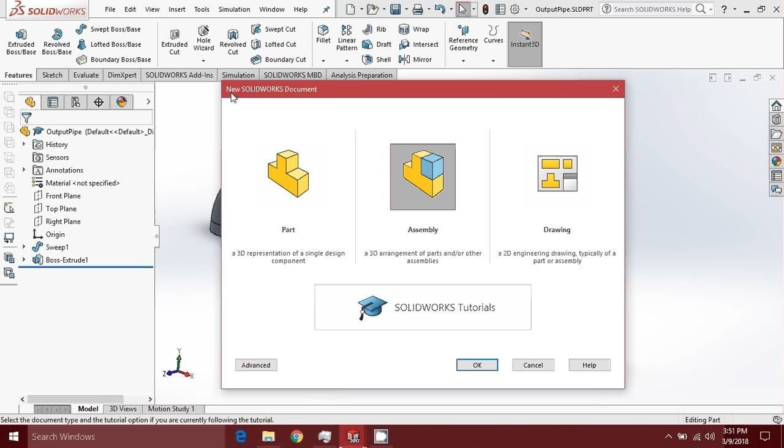To do this, I'll click New under the File menu and open up Assembly. It's asking me to begin by selecting parts to insert. I'll select the first one, the well casing, scroll down, select it, press OK, and place it in space. Now the first part that we select is fixed. You can tell here because it has the F, which means this part is fixed in space. It can't move or rotate in any direction.

This is very important because we consider this our base part and we assemble everything else based on this base part. The next thing I'll insert is the well seal. I'll go ahead and place that in space. I'll right click here and click Float to make sure this part is not fixed as it previously was, and now drag this out here in space.

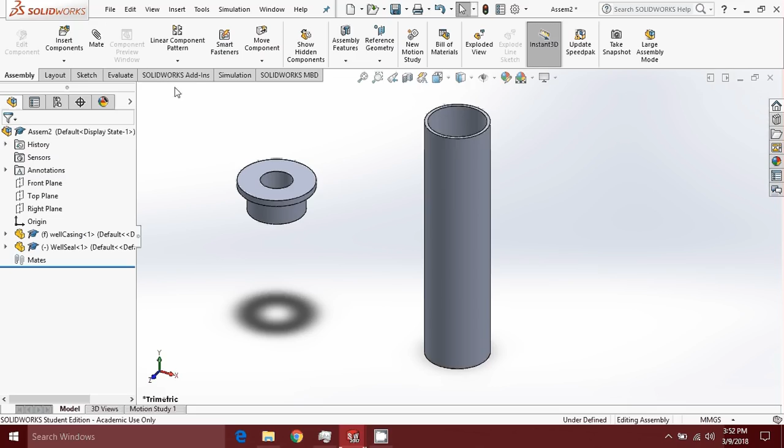Now I'll click Mate, and I'll mate the inner cylinder here of the well casing to the outer cylinder of the well seal, and it's going to automatically create a concentric condition, which is perfect.

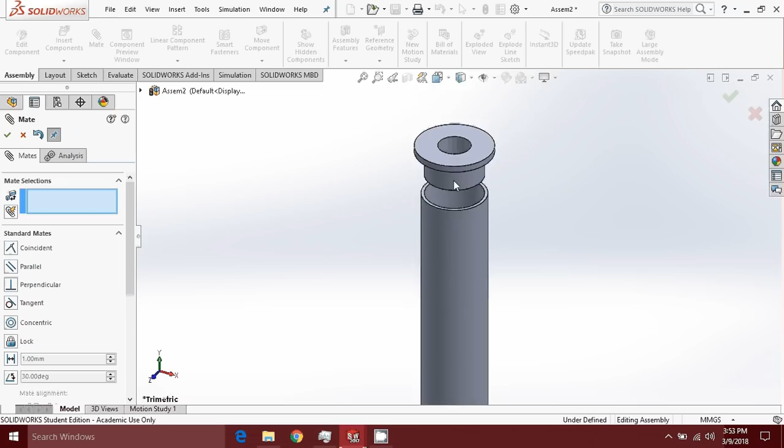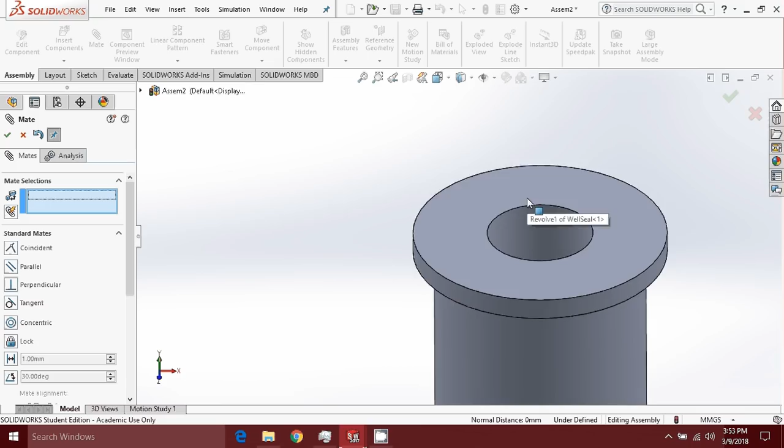Then I'll go ahead and slide the well seal up, and create a coincident mate by selecting the top face of the well casing, zooming out, and selecting the bottom face of the well seal, so they line up coincidentally by default. I'll press OK. Now we'll zoom out back to the full assembly.

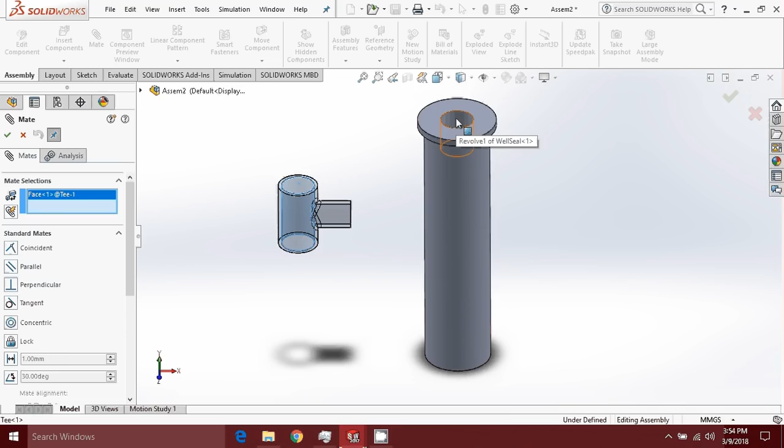Next, I'm going to assemble the T. I'll insert the T and place it over there in space. Same thing, I'll select the cylinder of the T to match the cylinder of the seal, then drag this upwards. You can see it rotates as well as moves along the axis. I'll select this top face of the seal, zoom in, select the bottom face of the T, and press OK.

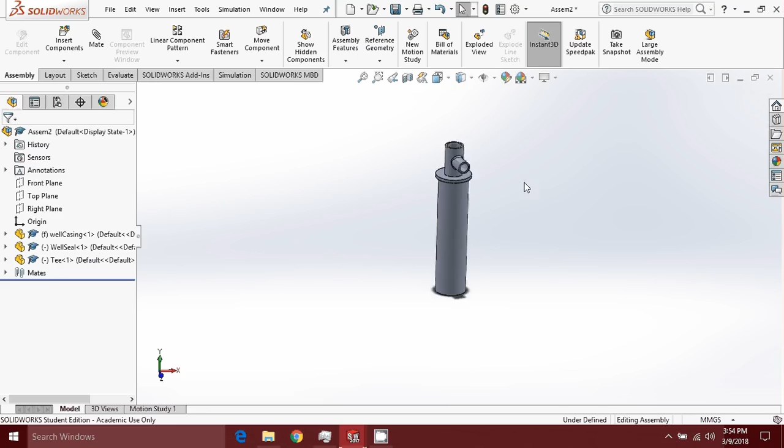Now before moving on, I'm going to create another mate. There are a number of different ways of doing this, but essentially this T right here can rotate in any direction right now, because we haven't set any kind of mate restriction onto the direction of this T.

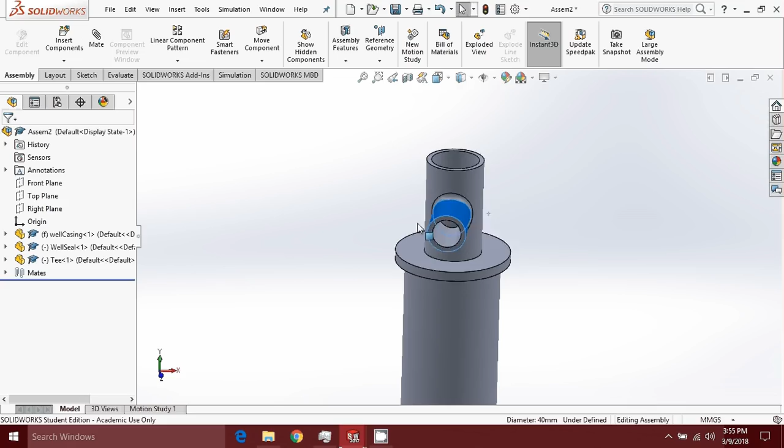The other option, of course, is to create a mate which locks the relative position of this T to the base part, the well casing. So I can select the two and select Lock, then press that. That locks the position, so this T can no longer move based on the well casing, which is another option to us.

I'm going to go ahead and delete that mate. The other one, which I find more useful, is to create a mate between any of the faces here and some relative geometry that makes sense. So I'll pick this right plane and set those parallel.

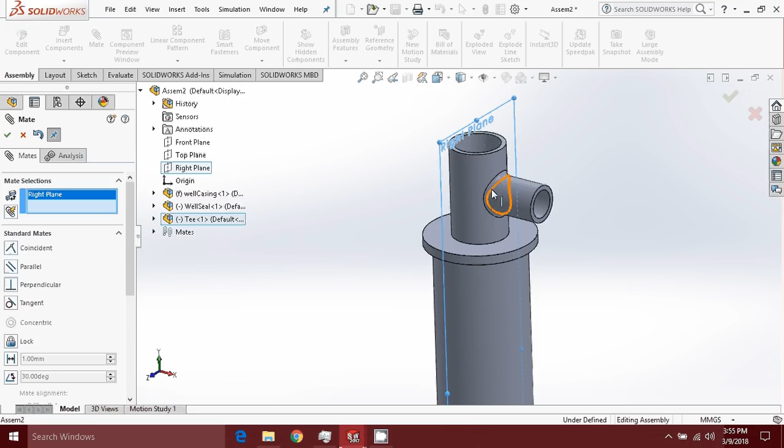So now, no matter which way I orientate or lay out my components, this T face will always be parallel to that right plane. This is really important because as we move through this assembly, there are a lot of unknown orientations of components, since we haven't built the base yet for this pump, so there are a lot of unknown variables.

Those unknown variables will cause a lot of headache when you're trying to manipulate the position of your components, because there are too many free variables and too many components allowed to move. So start by fixing this T so it cannot move, and it'll save you a lot of time and headache later on.

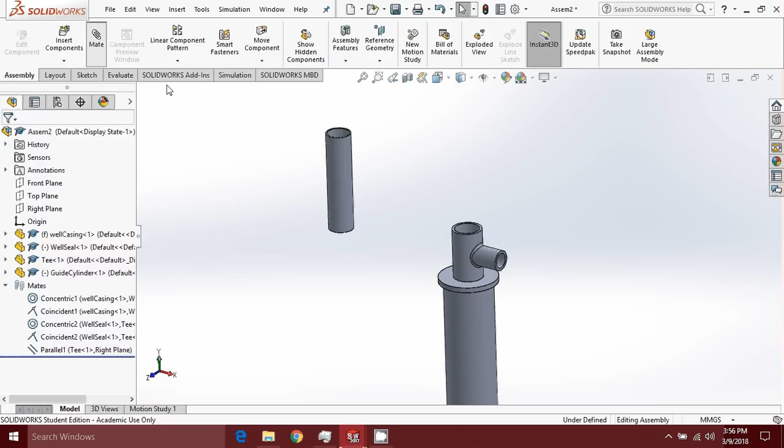Next thing I'm going to do is insert the guide cylinder. I'll select it and drop that in there, and mate the cylinder with the T concentrically. Now I'll select this top face of the T and the bottom face of the cylinder, just like that, and you'll see they coincidentally mate to be flush. Then I'll press OK on that.

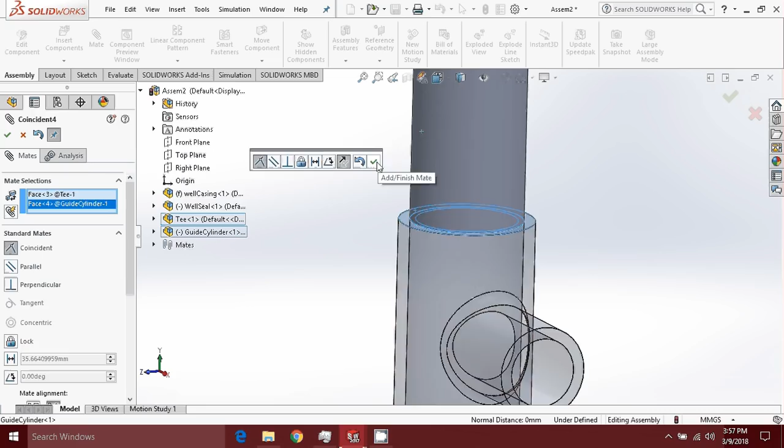Alright, so let's zoom out. Here's where we're at.

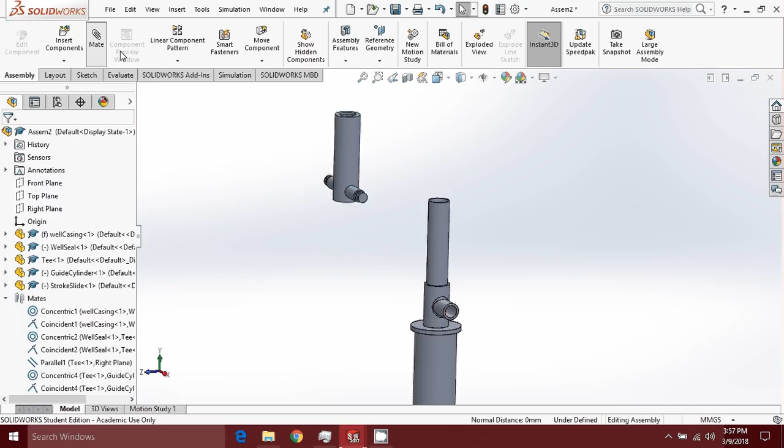Now I'm going to insert the stroke slide. I'll go back to my stroke slide and place that like that. And I'm going to start by making a concentric mate between the cylinder of the stroke slide and the cylinder of the guide cylinder.

Now you can see here I can move this up and down and rotate it. So we'll select one of these cylinders exiting the stroke slide, pick any one, doesn't really matter. And we'll also select that T, the cylinder exiting the T, and we're going to make those perpendicular.

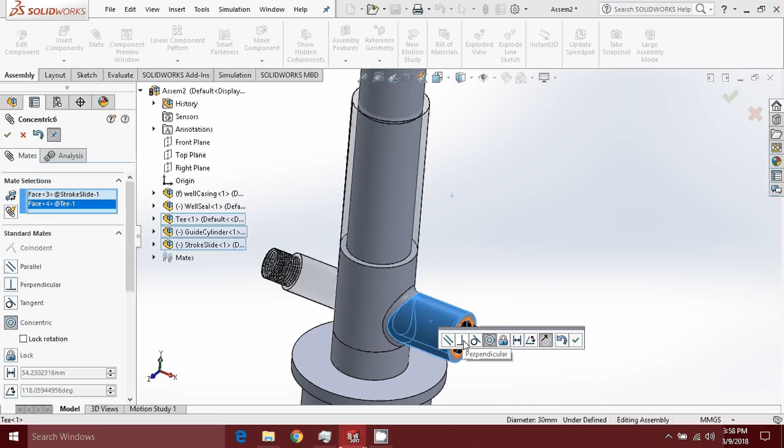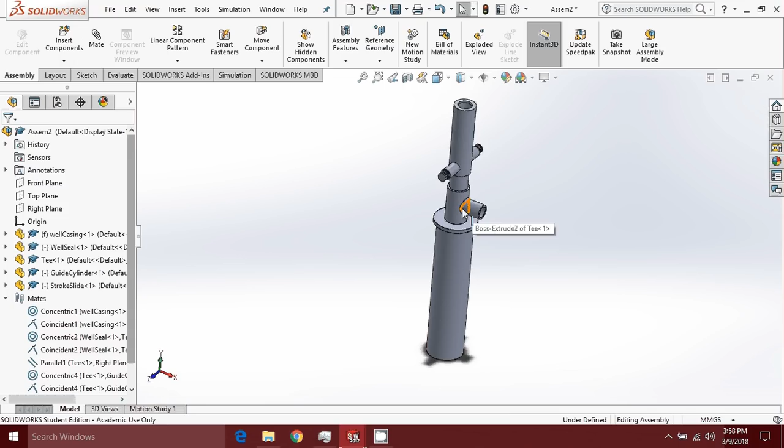Okay, so now we can see here that the stroke slide can move up and down, as it's supposed to in the pump design, but it can't rotate left or right because it's fixed to the 90-degree perpendicular mate between the T and the stroke slide. So make sure you're following these steps of how I am mating these components, because if you miss out something like that perpendicular, you're going to have too many degrees of freedom in your components, and it's going to be a huge pain later on.

Okay, now we can go ahead and keep this. I know in your lab manual it says to lock the movement of the stroke slide. You can go ahead and just keep it free for now. I don't think it causes any issue in my way of mating. So you can just go ahead and leave it the way it is.

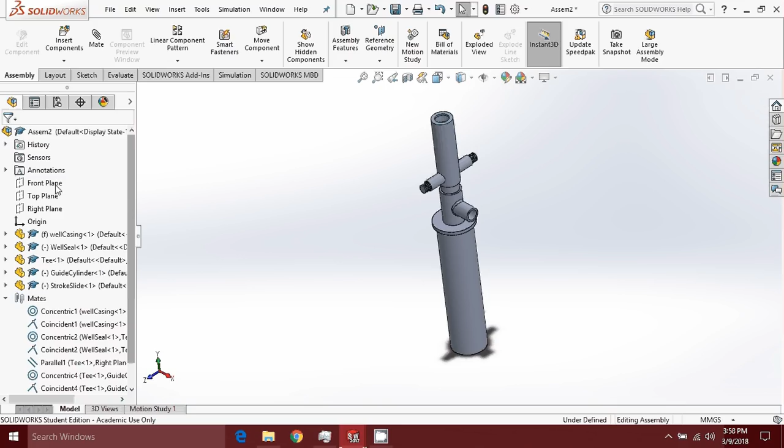Next we'll insert the offset link. So we'll drop one in there. And I'm going to go ahead and insert two since they're so similar.

Now, I don't know if you guys can see that, but for me it's pretty obvious that one of these holes is bigger than the other. An easy way to check is to look at the gap between the hole and the outer radius, the fillet that we made. You can see here this one's got less material, this one's got more material. So this is the larger of the holes, the 30mm hole, and this is the 24mm hole.

So what we want to do is mount the 24mm hole on the stroke slide, which you can see here, and we'll mount the 30 above.

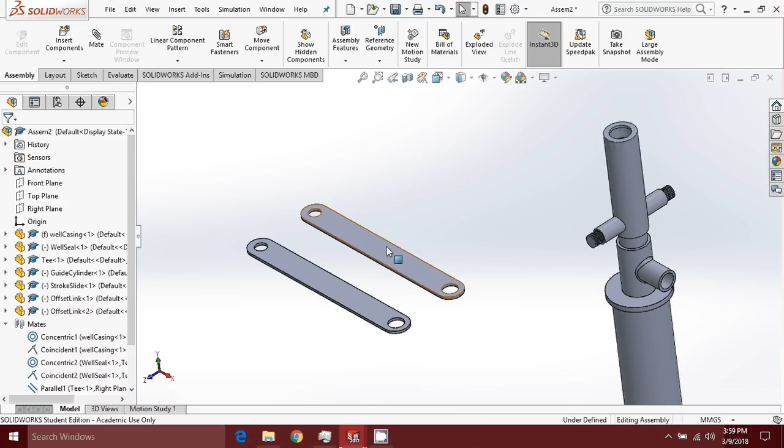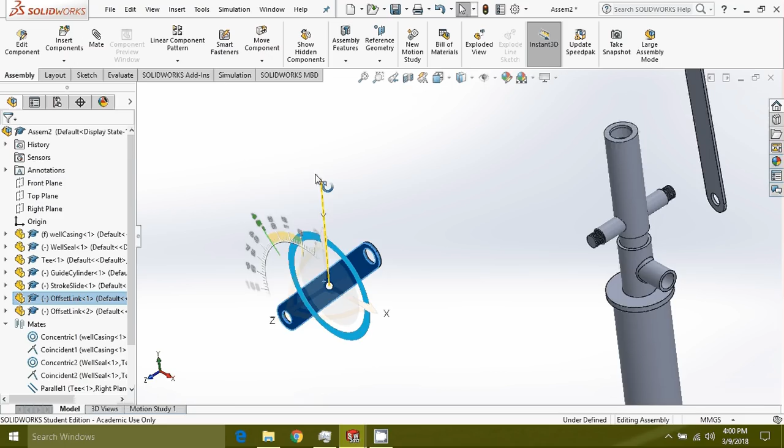So if you remember from our first labs 1, 2, and 3, I said that it's always a good idea to rotate your components and put them in their position before you start mating. I'm going to do that here by moving with the triad so I can get the correct orientation of these two links. Just like that, something like that. Doesn't have to be perfect, but just enough to help you out.

And now I'm going to go ahead and mate the cylinder. I'll select that cylinder there. So that's the concentric mate that I need. And now I can still drag this in and out.

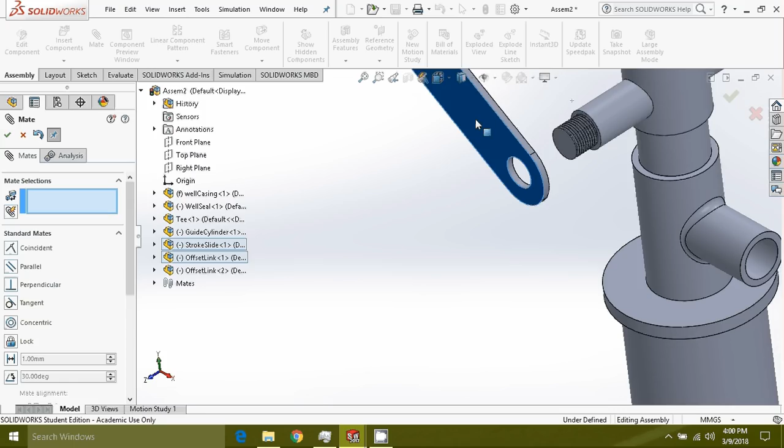So I will create another mate on this surface here and the inside surface of the link, just like that. Now I'm going to do the same thing for this link here.

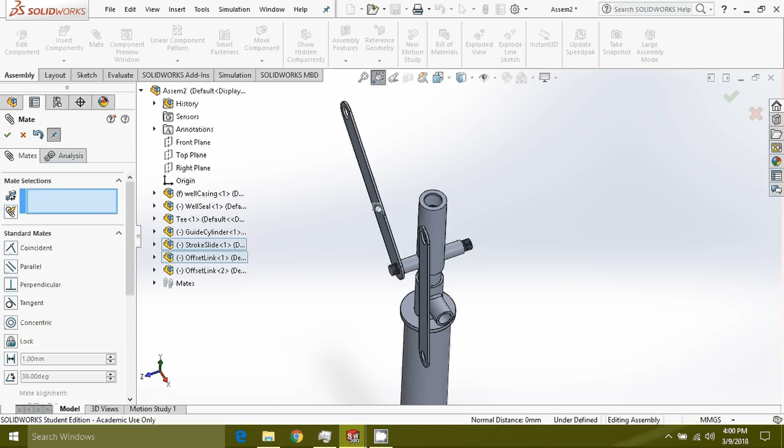You'll have to excuse me, my SolidWorks is being very difficult today, and it keeps zooming in and out for me. But anyway, we'll select the cylinder of the stroke slide, and then we'll zoom in here and select the inner cylinder of the link. You can see there it snaps concentrically, perfect.

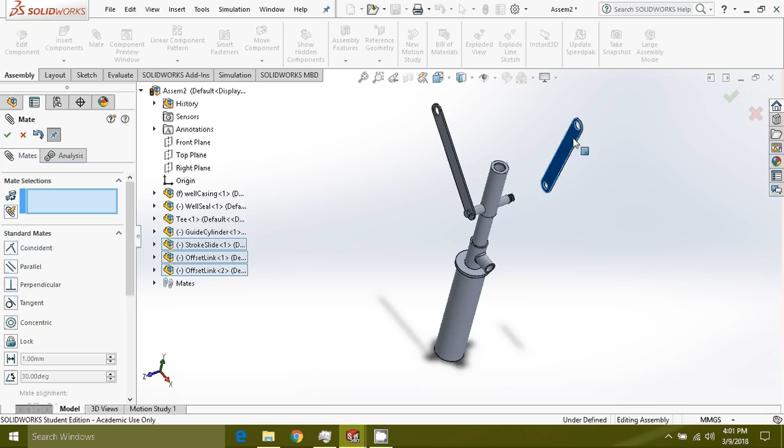Now I'll pull this away, and all I gotta do once I zoom in here is select the inner face of the link and this face right here on the slide, and you can see there they mate coincidentally, and there you go.

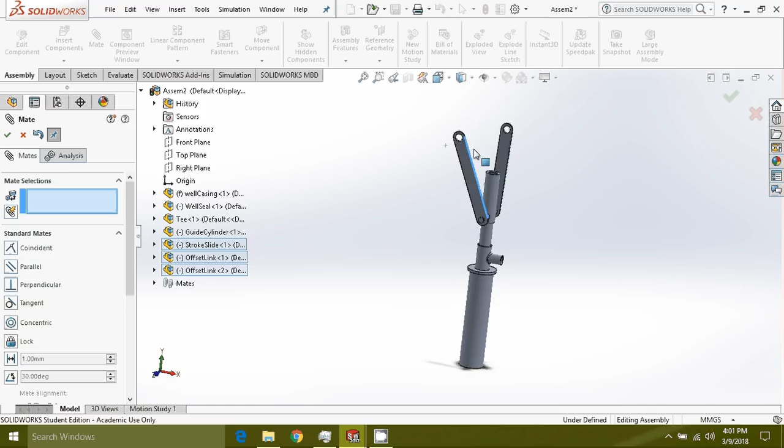Now you might find it easier to just sort of line these up vertically for the next step, which will be to add the pivot block.

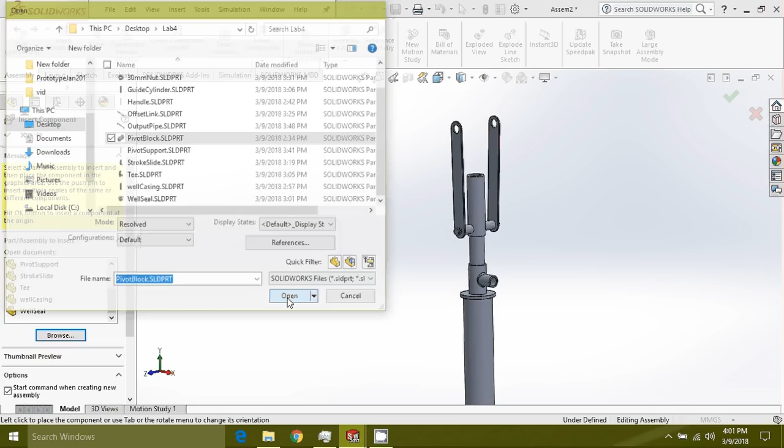So I'll go ahead and exit this dialog box, insert the new component, which is the pivot block. Mine's not open, so I'll just open it from that dialog box and drop that guy right there.

Okay, now I'll rotate this, something like this. Okay, and I'm just going to move it roughly in place. That's pretty close. Now I'm going to go ahead

and make these components mate by selecting that cylinder and the cylinder of the link, and then the same thing on this side, that cylinder and the cylinder of the link. Okay, we'll zoom out now. There we go.

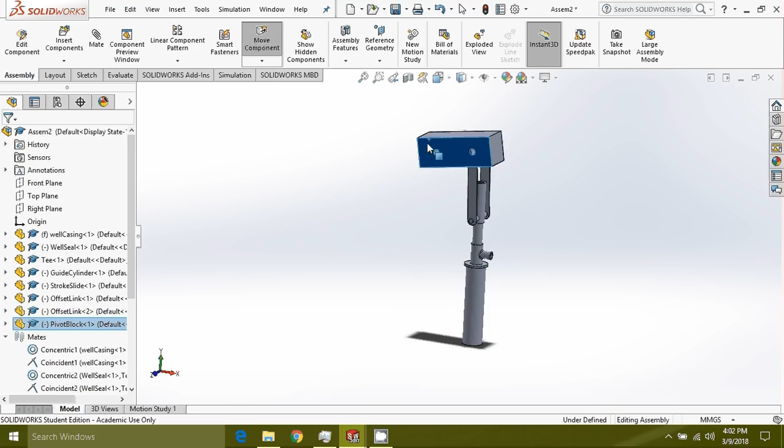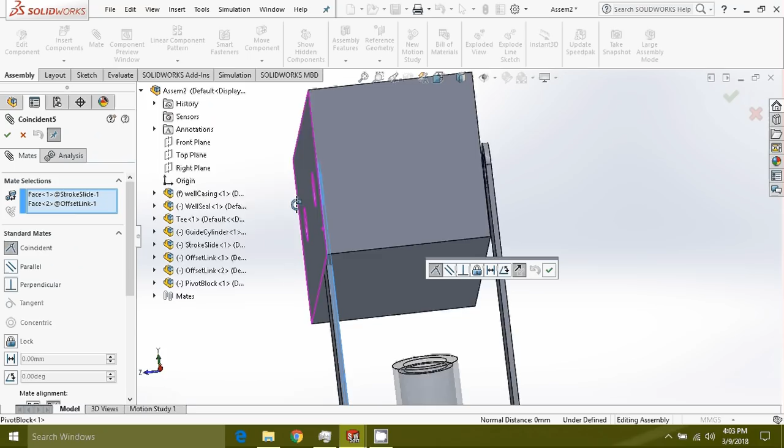Okay, whoops, I think I may have made a mistake with one of these mates. Yeah, okay, so I made a mistake here with this last mate. I'll just quickly edit that. Actually, that's very strange. Ah, there we go.

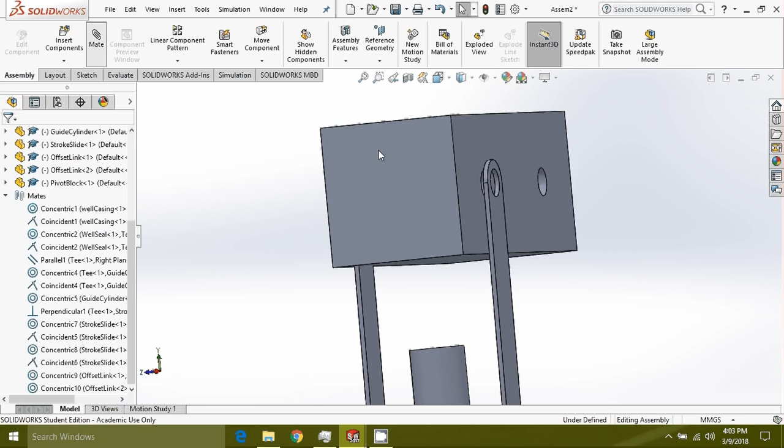I'm just going to create another mate here. I'm not sure why it's giving me such an issue. There we go. Okay, looks good. I think the issue there was one of the SolidWorks gremlins not understanding my coincident mate. But there we go, that works fine now.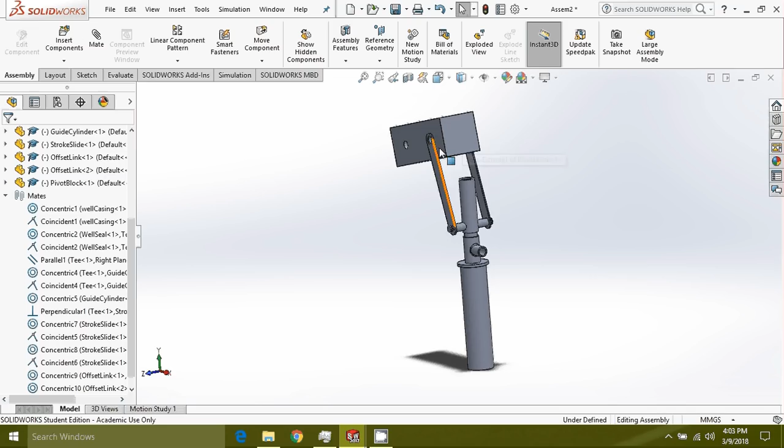So now, after creating those mates and having the pivot block mounted to these offset links, we're going to insert the pivot support. Again, insert components, pivot support, and just drop that somewhere in space. I'm going to rotate it to match the orientation of the rest of the components, and place that somewhere like that.

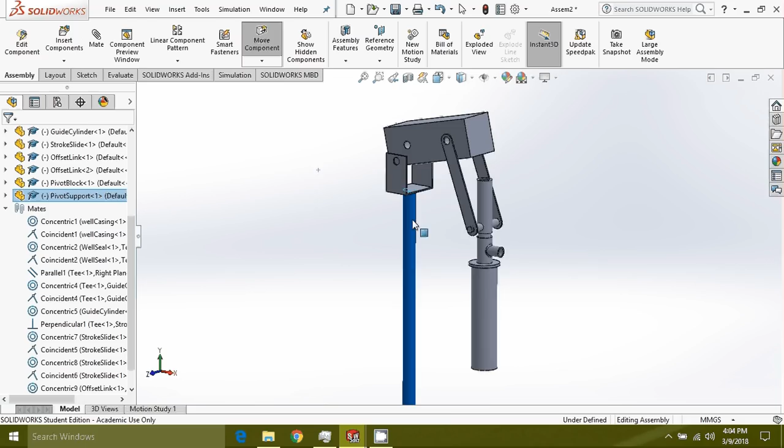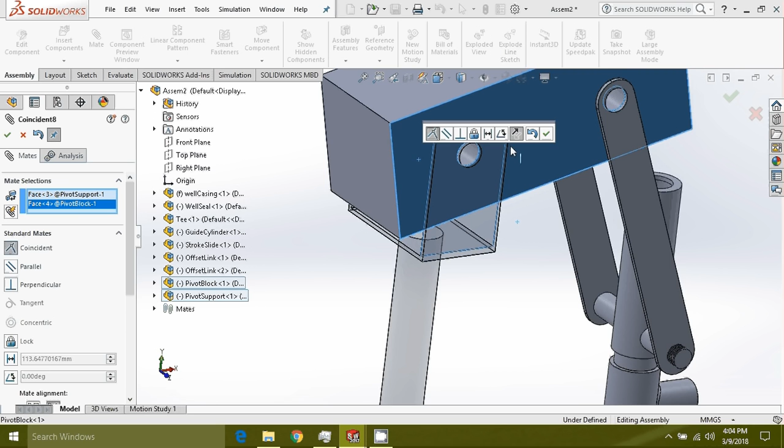Now I'll zoom in and mate that cylinder with this cylinder concentrically. Okay, and now I'll go ahead and select this face, and this face there, and mate those coincidentally here. You can see that, and there we go.

So now this is where I think a lot of the confusion from mating this assembly comes from. We have a lot of unknown variables in terms of rotation, in terms of position, and we'll start to mate some of those to fix some of the issues. We can see here by lifting this pump, it's not exactly operating as we expected. So we'll start fixing those immediately.

To do that, I'm going to select the shaft of the pivot support and the shaft here of the well casing, and select parallel. Parallel just puts those axes parallel to each other, and you'll see it just means that they'll always be vertical relative to each other, which is exactly what we want.

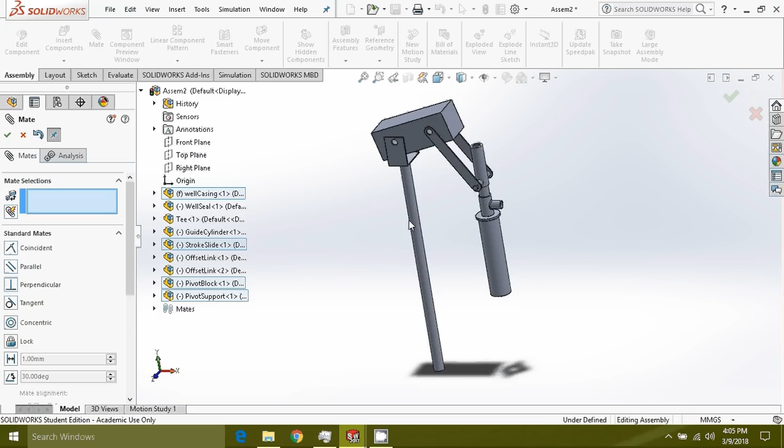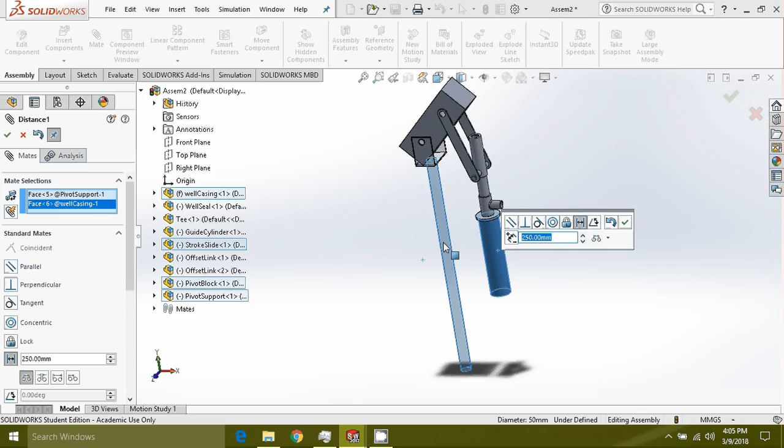The next thing I'm going to do, and this is my suggestion to you, I know it doesn't mention it in the lab manuals, is to select the cylinder again of the pivot support and the cylinder of the well casing and set up a distance mate. Now you can pick any arbitrary dimension as long as within a certain range, so I like to go with 250 millimeters. That locks my pivot support to 250 millimeters in this direction from the well casing.

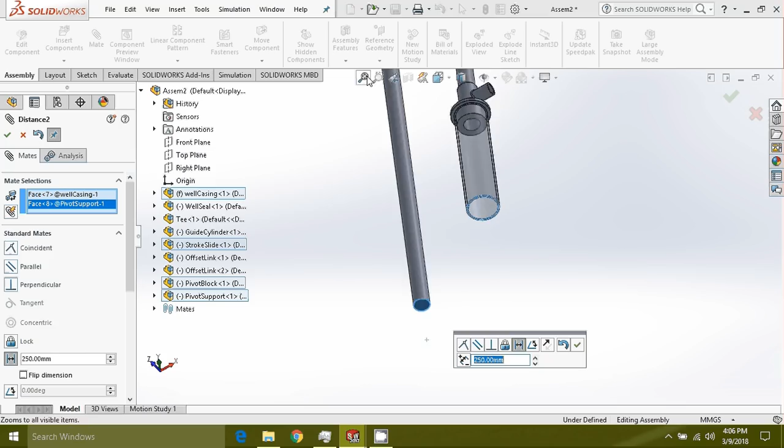I'm also going to do a distance mate from the bottom of the well casing to the bottom of the pivot support. Same thing, distance, and in this case I'm also going to do 250 millimeters. Now this is just my suggestion, this is not something that's covered in the lab manual. I have found this just makes it a lot easier for me to assemble this pump.

So what that does is it locks the position of this pivot support to two variables, which are the distance away radially from this case and the distance vertically from the bottom of the case to the bottom of the pivot support. Now you will need to know those dimensions when you're creating your base for the Lab 4 mini design project 4,

which you're asked to create a base that this pump will stand in. Now your base, of course, you're going to have to create two circles, one cylinder hole for this pivot support to mount to, and then another cylinder hole for this case support to mount to.

So if you think about it, that's essentially what I've done right here by creating those two dimension mates, right? I created a distance mate between the bottoms, which shows the relative distance between them, and then I created another distance mate which shows the distance between the pivot support and the case of the pump here.

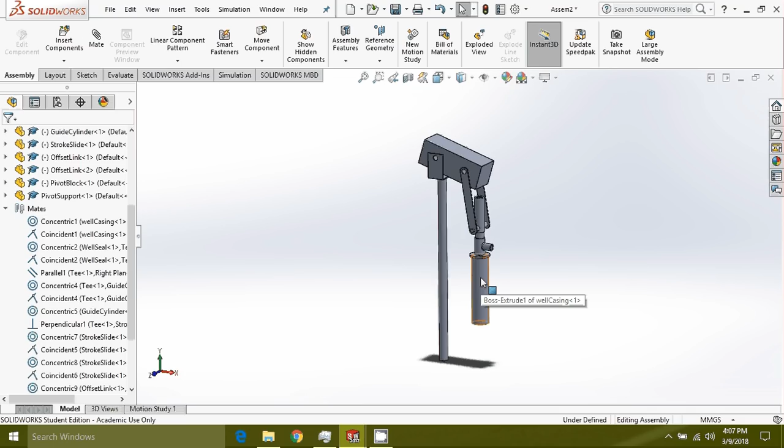So when you're creating your base, my suggestion is to create these mates, those two mates that I've just set up, which lock the position of this support, and then replicate those mates in your base by selecting a hole that is, say, 250 millimeters away from this pivot support to that case, so it matches my mate, and then make sure that your extrusion is whatever depth this depth is here.

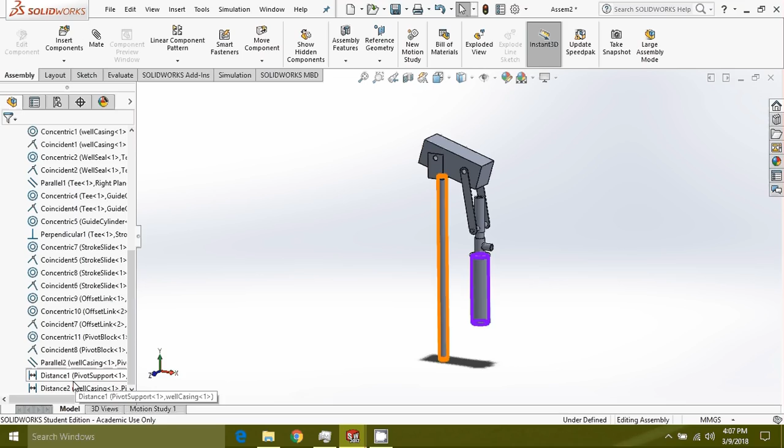You can play with these dimensions, it doesn't have to be 250, that's just my personal preference. You could do 300, you could do 175 perhaps, but just fix that so that this pivot support doesn't move around, and you'll have a lot easier time creating the rest of the assembly.

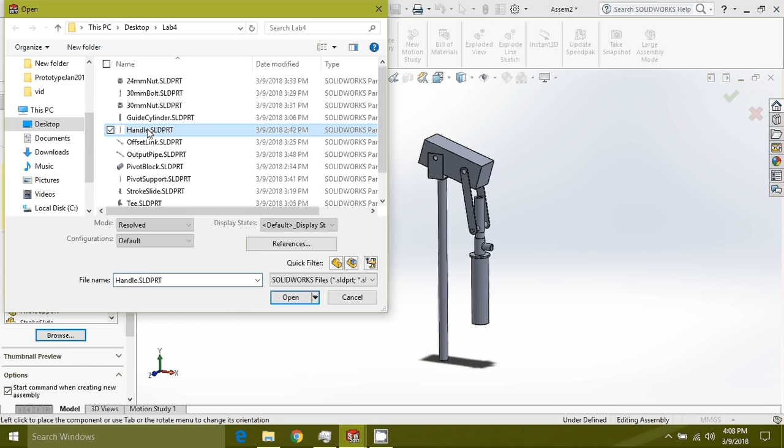Now once my pivot support is in place and I've created those mates, I'm going to go ahead and drop in the handle, which of course is not loaded right now. I'll go ahead and drop the handle in like that. I'm going to rotate my handle using move with triad. Alright, something like this. Okay, alright, that looks roughly in place.

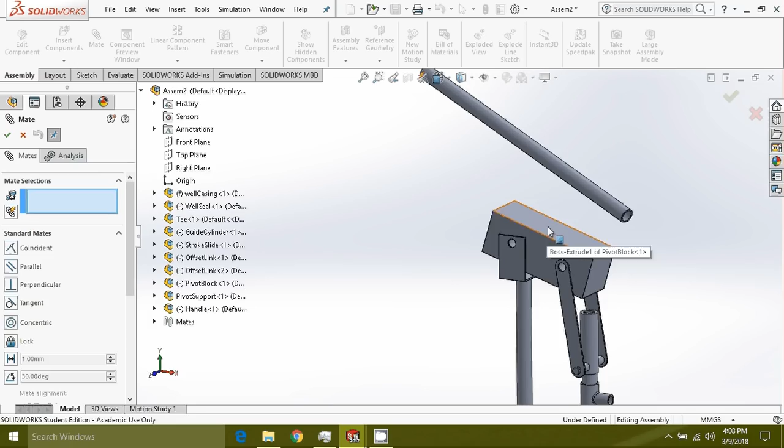Now I'm going to mate it to the top face of the pivot block. So it'll automatically pick coincident, which is exactly what I want. And now we can see that my pivot block and handle are flush with each other. Of course, they're just all over the place in terms of angle and other dimensions.

So to fix that, I'm going to select this edge of the pivot block, and the edge, either one, doesn't matter, of the handle, and I'm going to make these parallel, not coincident, parallel. So now I can still move my handle forward, backward, up, down, left, right, but I can't change the angle of it, which is perfect.

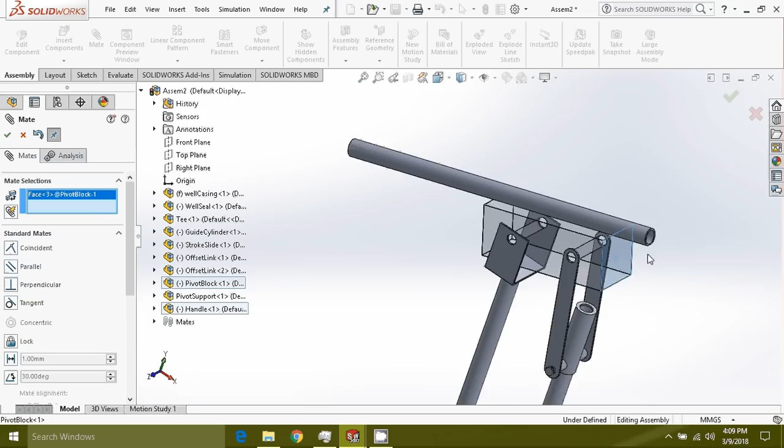Now I'm going to select the front face of the pivot block and the front face of this handle here. I'm going to set up a mate between the front face of the pivot block and the face of the handle. It's important that you click the face. I'm going to set up a distance mate once again.

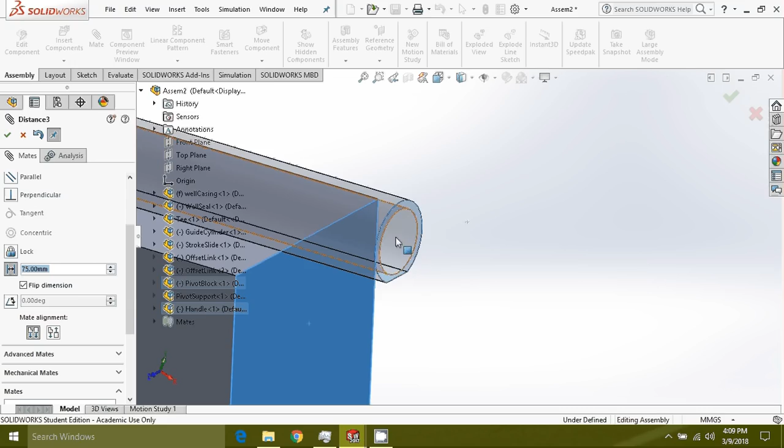I'll set this distance mate in the dialog box to 75 millimeters. Now you can see my handle is past the pivot block, and that's not what we want. What we want, if you look at the lab manual, you'll see it in steps. What step is this here? Step 23, I believe.

So if you look at your lab manual, page 45, page 46, you'll see that we want the handle to be recessed here from this face. So I'm just going to select flip dimension, and you'll see that it places the handle further back, still 75 millimeters, but on the opposite side of this face. Go ahead and set that.

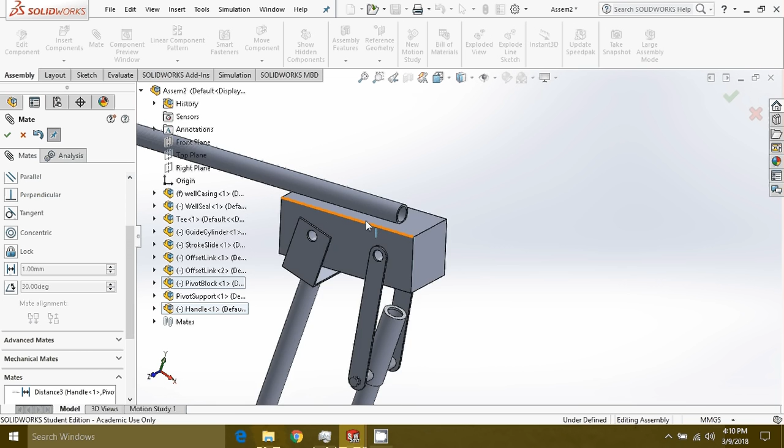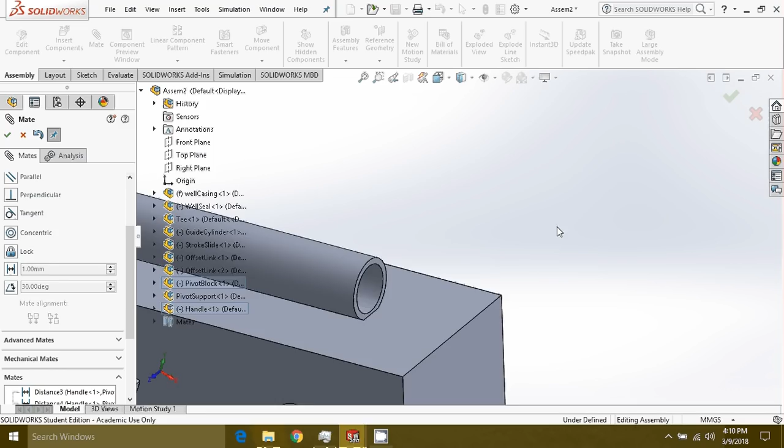Then we'll just zoom in here. I'm going to select this edge and select a distance mate of, I believe it's 64 millimeters. Let me just double check that. Yep, 64 millimeters, and press OK. So that lines us up right in the middle, you can see there. And that's mostly it.

Now we just have to put on some components here. We need the 24 millimeter nuts here. We have to put our bolt here and a bolt here in the nuts. But this is essentially the majority of the pump.

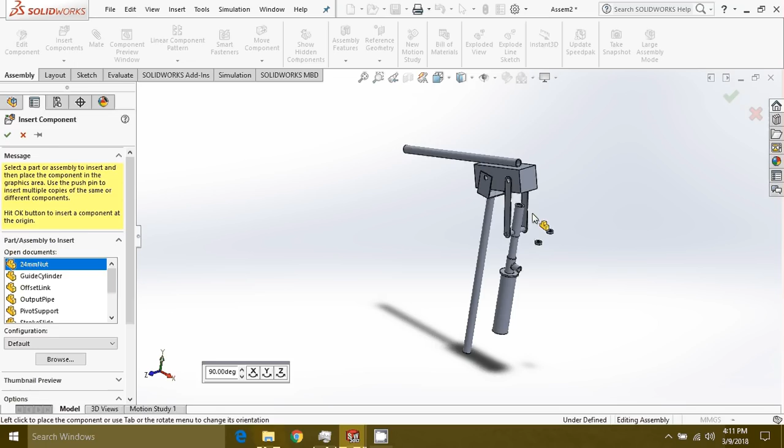To do those nuts very quickly, I'll just do the 24. I'll select the 24 millimeter nut and just place two of them, one there and one there. Now I can zoom in here.

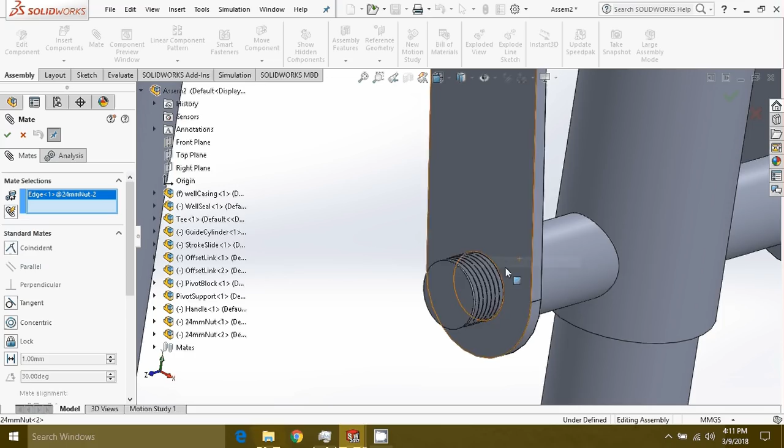Alright, select mate. I can mate. Now in this case I'm going to simplify things by selecting this edge right here, so you can see the inside edge of the nut. I'll select that edge and then select the inside edge right here of the link.

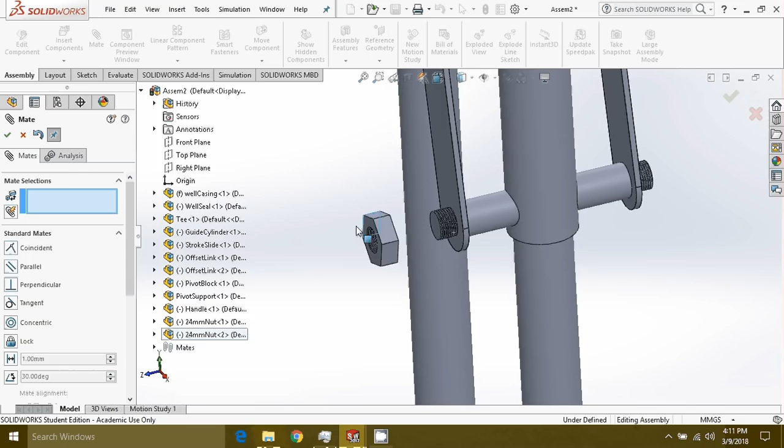Oh, that's my mistake, I selected the wrong edge. Concentric. There we go, no, okay, it works. There we go. So we have the concentric mate for the nut, so it matches the thread there.

Now I'll just zoom out here, select this face of the nut right there, and this face of the link, and press OK.

Now I'll just move over to this side and do the same thing. Select the edge of the nut and the edge of this link here. It's kind of difficult to find here with all the other thread lines, and then pull it back, select that link, and select the face of that nut, and there we go.

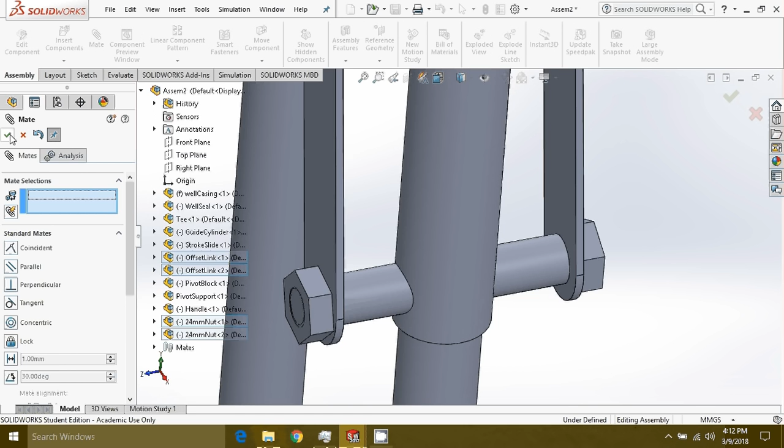Okay, so now we have our two 24mm nuts mounted in their place. We can zoom out here, and you'll see this majority of this side here is complete. We'll just have to add the outlet pipe. We'll do that last.

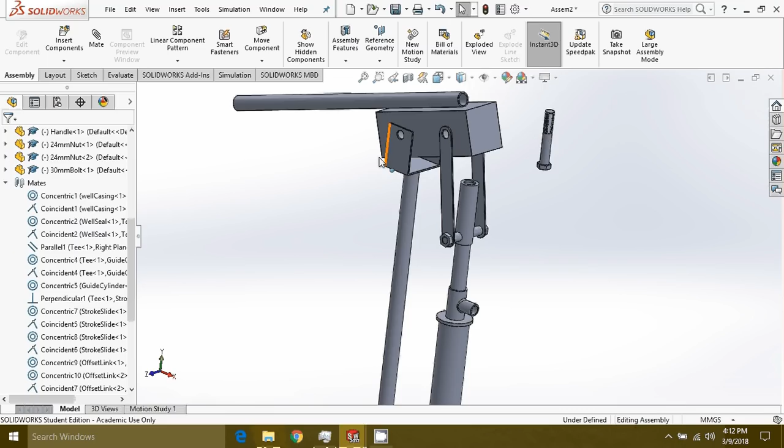Now I'm going to find the 30mm bolt and place two of those, one here and another one. Find it again. 30mm bolt, and place that guy over here.

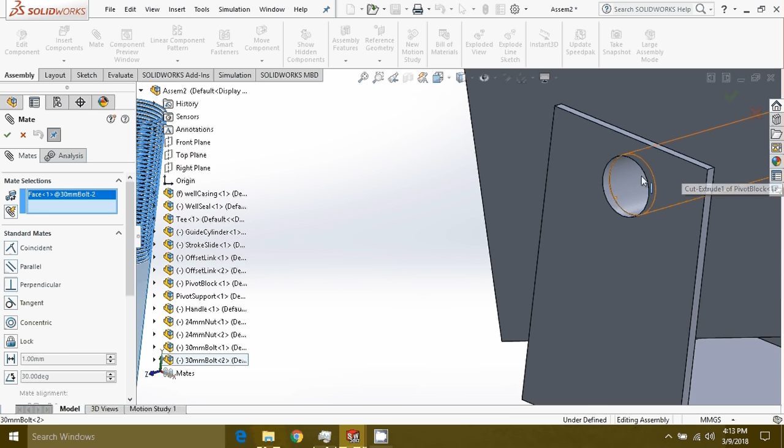And I'm just going to mate these by taking the cylinder of the bolt here and the cylinder of the pivot block, mating those concentrically. Now I'll select the face of the head there and the face of the pivot support and mate that.

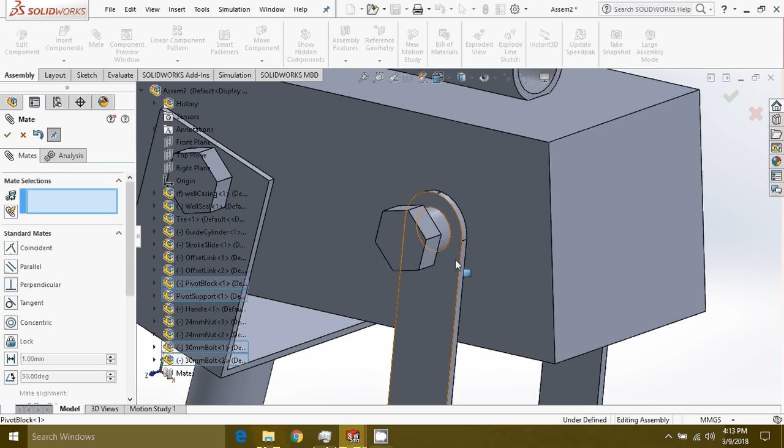Same thing over here. I'll take the cylinder of the bolt and the cylinder of the pivot block, mate that. Take the face of this link, and I'll just select the face of that bolt head and mate that just like that.

Now I can go to insert components and drop two of the 30mm nuts. We'll put one there and another one right there.

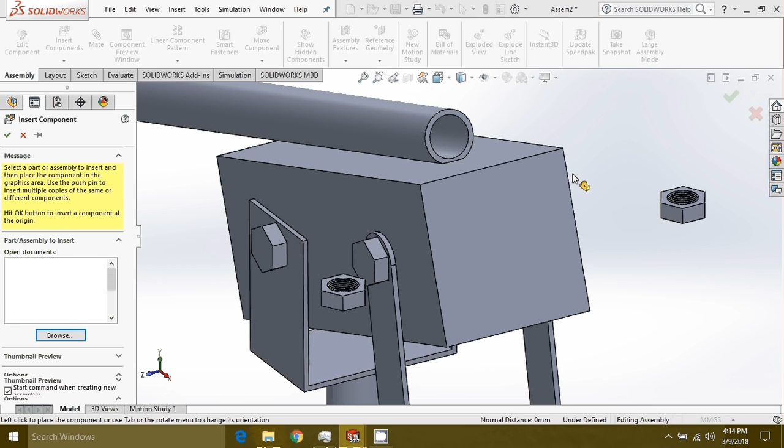Now I'll just mate again the edge to that edge, so it gives me a concentric mate. Perfect. I'll drag the nut away so I can see the faces. Select the face of the link and the face of the nut, and just like that.

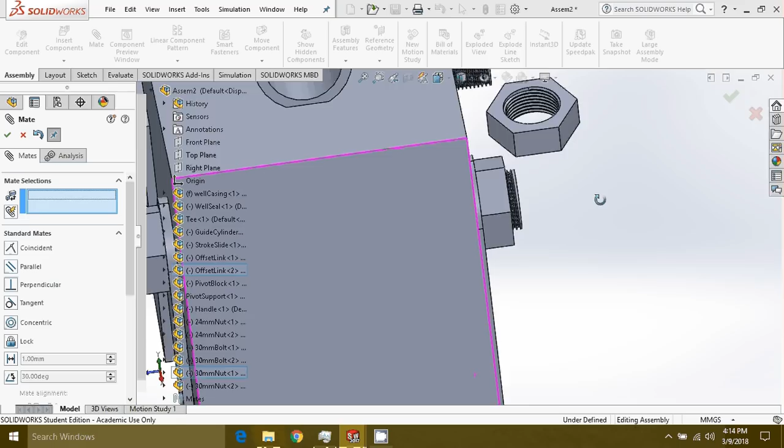Oops, I think we have a freeze here in SolidWorks. You can do it, come on. There we go, okay, we're back.

Now we had a little bit of a hang in the SolidWorks program, but that's not an issue. Okay, so we'll continue here with the edge there on the nut, concentric mate. Now I might just have to drag that nut there.

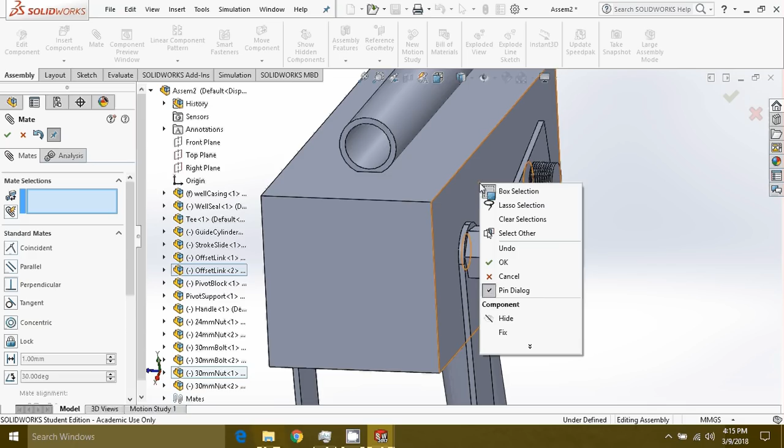No, it's lost. Okay, I'm just going to hide. There we go, pull that guy out, select the face there of the support and the face of the nut, and mate that there. Okay, so now I'm just going to unhide my pivot block because we had an issue there with the component.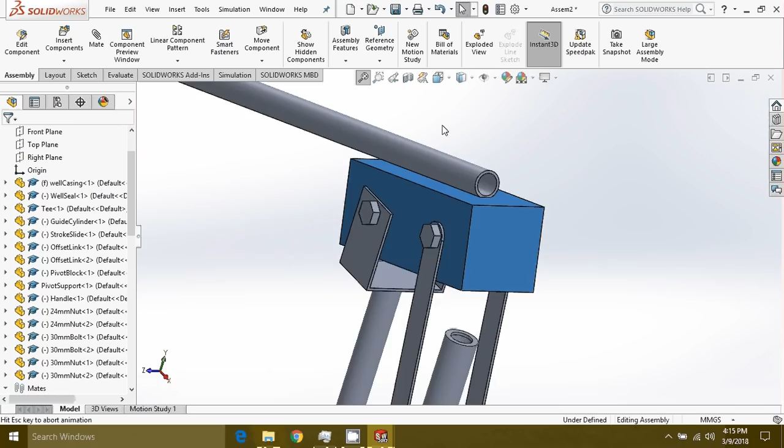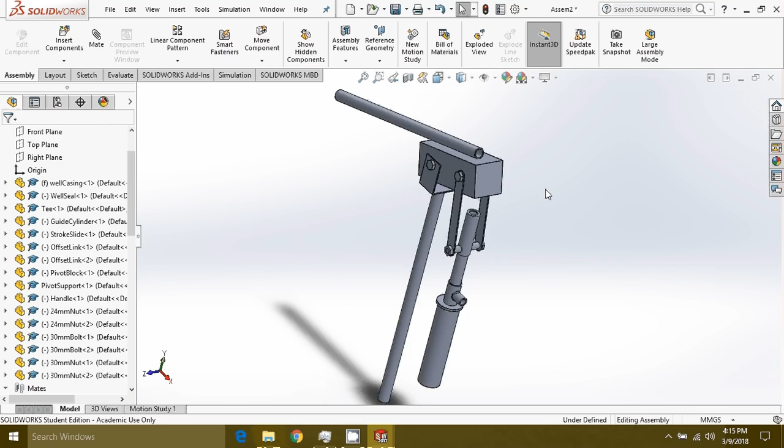Now we have a vast majority of this pump complete. It's a pretty complex assembly, considering up to now we've basically just done the cabinets, which are very simple square components with multiple repeated mates, being the door hinges. But this one here is a little bit more difficult.

Just take your time, follow step by step with the video. If you're getting frustrated, just zoom out. Remember what I said about the pivot block here, the pivot support. Make sure that thing is fixed in place so everything works nicely.

And you can see here now, I can operate my pump as it's intended to, exactly as we expected, right? There's no parts floating around, nothing is moving, and it works near flawlessly.

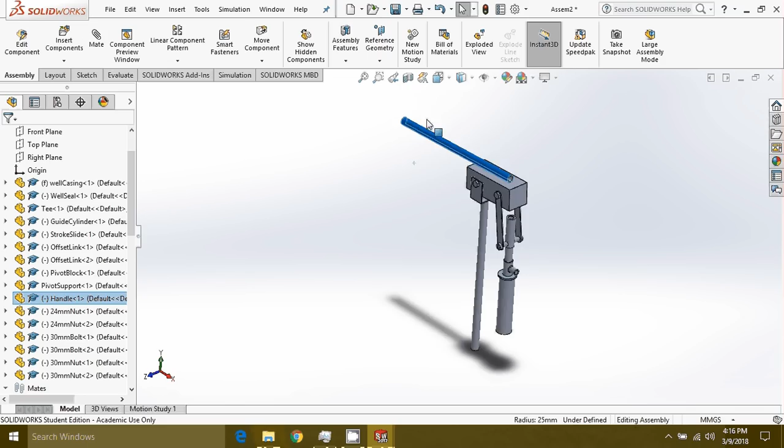The one thing I will suggest you guys set up is a distance advance mate. This is just something that goes above and beyond what we expect you guys to hand in for your design projects, but it's something that you can learn very quickly.

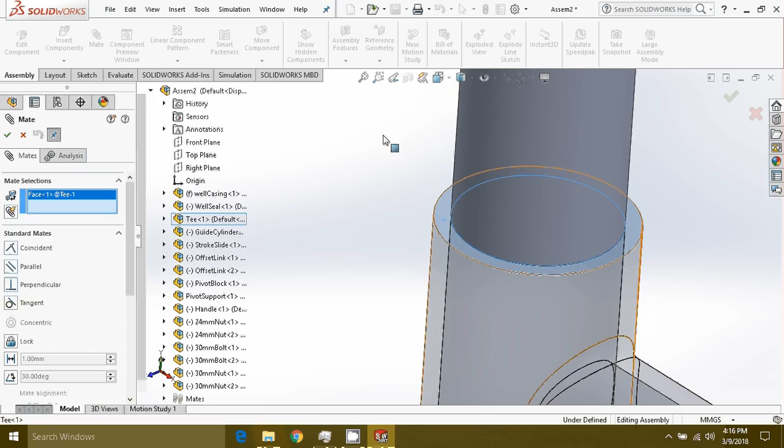I'm going to select the top face of this T, right? So you can see this here. Let me just zoom out. Today, please, SolidWorks. Okay, there we go. We had a little bit of a freeze again.

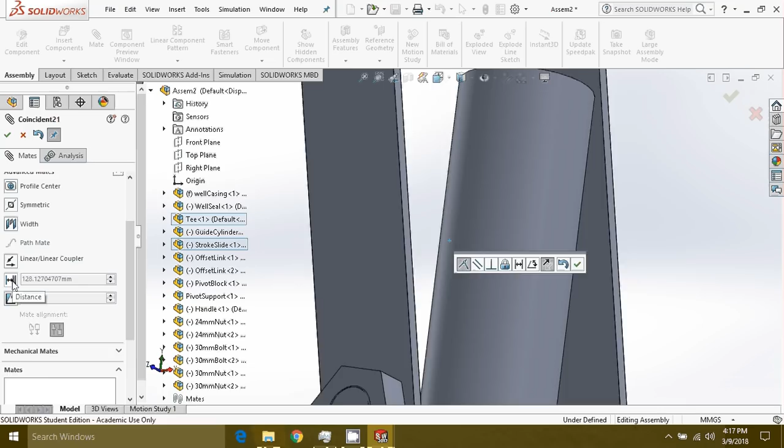I'm going to select the top face of that T and the bottom face of the stroke slide, and I'm going to set up a new mate. So over here in the mate dialog box, I'm going to select advanced mate and distance. This advanced distance sets a maximum and minimum, which I'm going to set as 200 millimeters as a maximum and 0 as a minimum value, and then press OK.

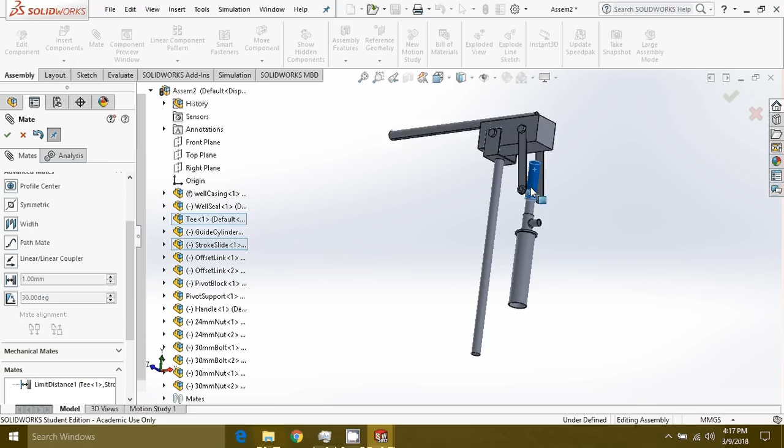You can play around with these maximum minimums, but a minimum of 0 makes sense because you don't want the stroke slide to go into the T, right? So you want it to stop right at 0, which is perfect, and then you want it to extend fully to the top, which is about 200 millimeters there. So here you can see with that mate in place, I can't go through the T, and I also can't extend past the top of the guide there, which is exactly how we want this pump to function.

So that takes a whole 20 seconds maybe to set up, and it just makes your pump that much more realistic when you're modeling it here in the assembly.

Okay, the last component is the output pipe, which I will just drop here next to its location. I'm going to once again move with the triad, okay, just like that, and then mate very easily. I'll just zoom in here, select that cylinder, select this cylinder. That's a concentric mate.

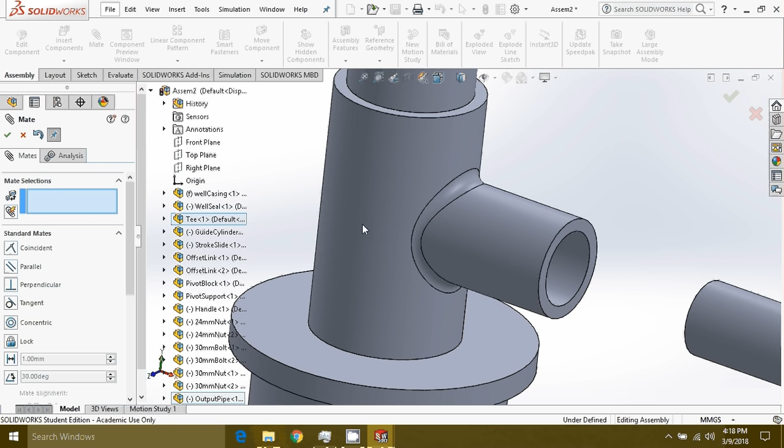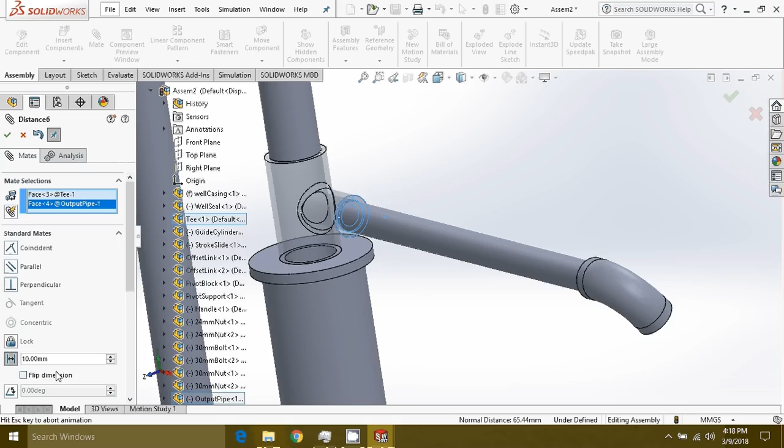Now I'll mate here the output face here and the output face there. I'm going to set a quick distance mate, okay, 10 millimeters, so that this pipe is recessed into the T, okay. If you have this issue, which almost everybody will have because it likes to default to the outside of the T, you just have to quickly select flip dimension, which inputs the pipe on the inside of the T by 10 millimeters, then press OK.

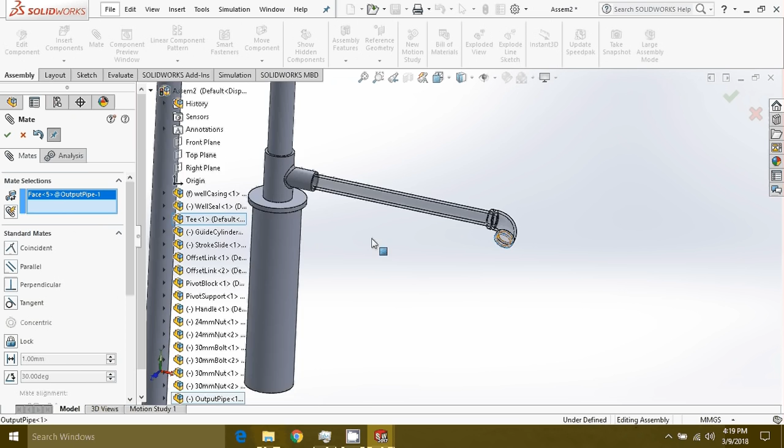And then the last thing you'll have to do is just make a parallel mate between the bottom face of your output pipe and, let's just zoom in here, the bottom face of the casing, just something that we know to be flush with the ground. So like that, we'll select parallel and then press OK, and if we zoom out you'll see that the output pipe is now pointing downwards as we expect it to. Right, there we go, we can see that there.

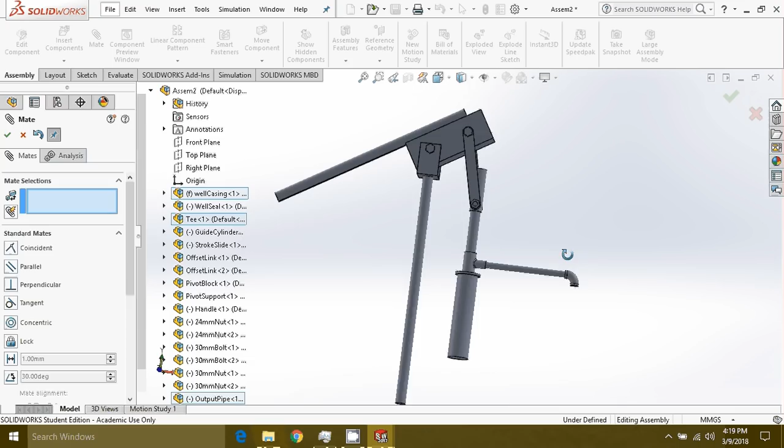So the output pipe points in the direction it should, the pump functions as it should, we have all the components placed, and we've already kind of started here, as I mentioned earlier, with our base design by setting those two parameters: the location of the pivot support relative to the base of the block, and the location of the pivot support radially from that well casing.

So that's just how I assemble it. I mean, if you were to follow the lab manual, I'm sure you would find that's a little bit different. This way works best for me, so I suggest, if you'd like to ask questions in lab based on how to assemble it, follow my steps first, and then I can help you guys troubleshoot your problems.

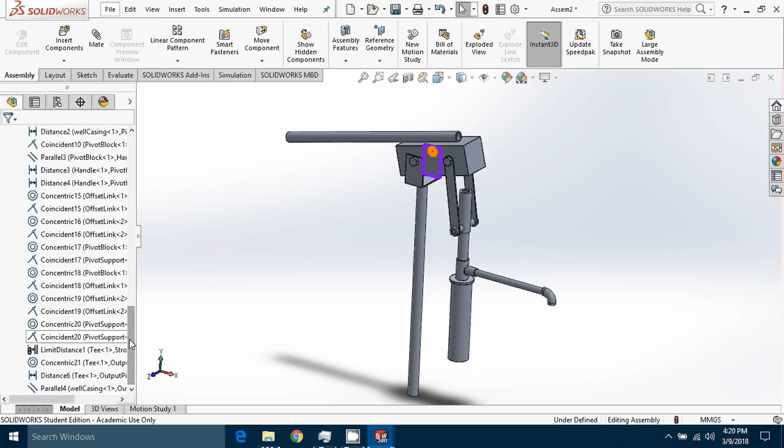As I mentioned before, the distance mate between, let me just pull these up, the distance mate between the pivot support and well casing, you can adjust those parameters to however you would like to manipulate your pump so that it fits exactly the way that you envision in your base, and then just take those dimensions and create your base from that.

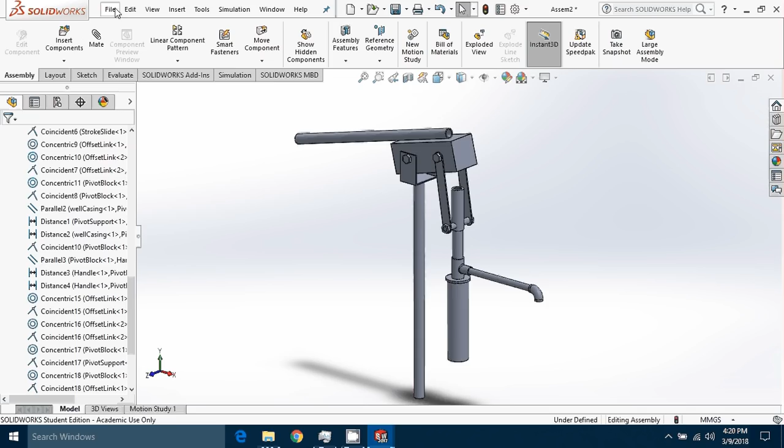Once you're all done with this assembly, just go ahead and click save, and make sure of course that you have it saved in your Lab4 folder as pump assembly, and then you can go ahead and start working on your mini design project 4.